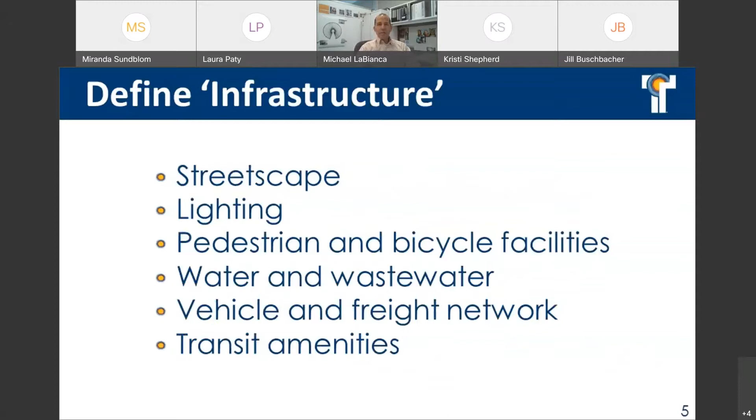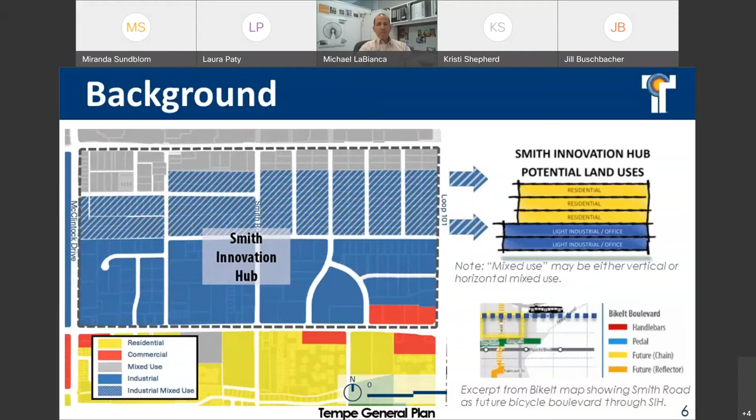An example of the mixed-use land use is Tempe Station, a multifamily and retail development with hotel planned for the vacant parcel along Rio Salado between Perry Lane and Smith Road. In addition to the general plan amendment, the city approved the Smith Innovation Hub Development Guidelines. There are also a number of existing City of Tempe policy documents that provide guidance for the proposed improvements.

Tempe recognizes the operation of many businesses in the Smith, both new and those that have been here for decades. Approximately 250 unique employers reside in the Smith, employing over 5,000 people. The majority of buildings in the Smith were originally built for industrial and manufacturing uses.

The design features of these buildings are more consistent today with newer uses such as mixed-use commercial, office, and retail, as modern industrial manufacturing businesses typically require higher ceilings, wider and taller shipping bays, wider turning radii on site, and larger lots. As a result, the Smith is experiencing changes in the use of buildings, resulting in greater occupancy and changing uses.

In addition, the Smith's location is also very important in determining the infrastructure needs for the greater area. This graphic highlights some of the surrounding land uses, such as Tempe Marketplace, the Rio 21 development, and the proposed Novus development, north of Rio Salado Parkway, west of McClintock Drive.

Physical barriers that exist east and west of Smith include the APS substation to the west and State Route 101 loop to the east.

The area immediately south of the Smith includes the Escalante and Alegre Parks communities. These neighborhoods are home to nearly 9,000 people. This population, largely multifamily residents, have higher shares of demographic groups that contribute to transit dependency when compared to the overall city. Zero-car households are nearly 1.5 times the rate of the city, and these factors contribute to a population that uses transit and bikes for commuting at 1.5 times the city's rate.

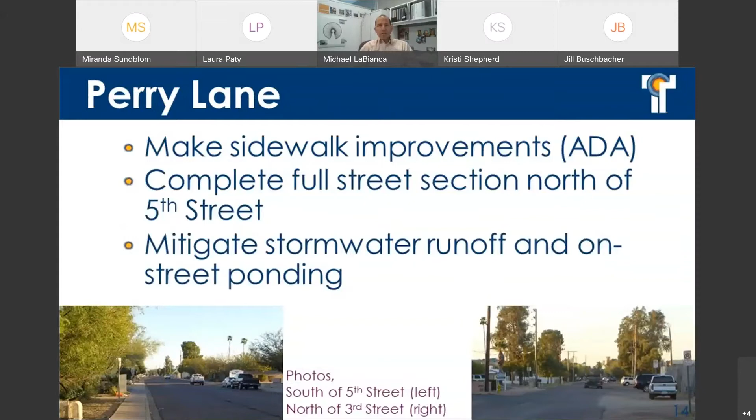All of the improvements on Perry Lane would address sidewalk gaps and improve sidewalks and intersections for ADA compliance. North of 5th Street, improvements would address the lack of curb and gutter and drainage.

Alternative A on Perry Lane, north of 5th Street, includes parking on both sides of the street, curb and gutter, and sidewalk at the back of curb. Note that lighting is shown on all alternatives, as lighting is proposed in the short term on these routes, addressed in a later slide.

Alternative B introduces sidewalks detached from the curb to accommodate a landscape strip with street trees and the ability to incorporate low-impact development.

Low-impact development is a sustainable approach to stormwater management that utilizes the landscape to absorb stormwater runoff, reducing off-site flows that can contribute to stormwater ponding and increased infrastructure costs. On Perry Lane, north of 5th Street, low-impact development would introduce curb cuts and curb extensions that would replace some on-street parking with landscape areas that would use low-impact development techniques to manage some of the stormwater.

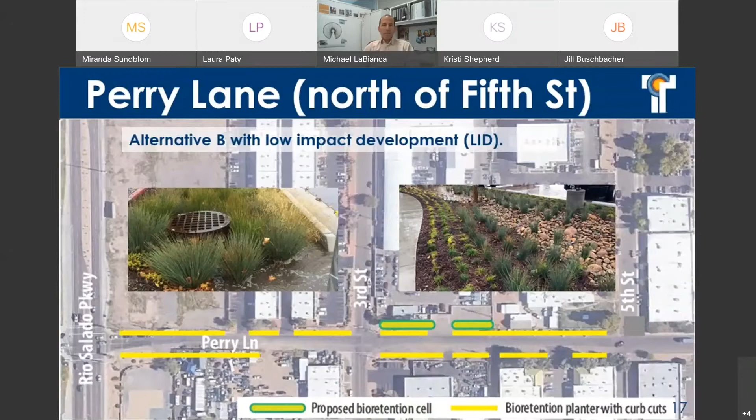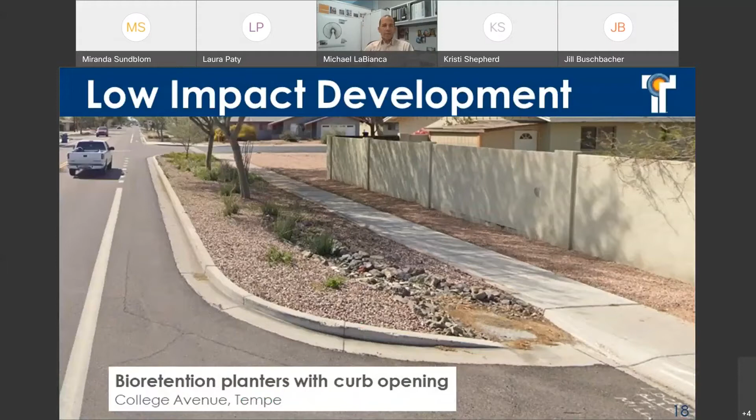For Perry Lane south of 5th Street, proposed improvements include the addition of on-street parking, street striping and lighting, and improvements to sidewalks at intersections with 5th Street for ADA compliance.

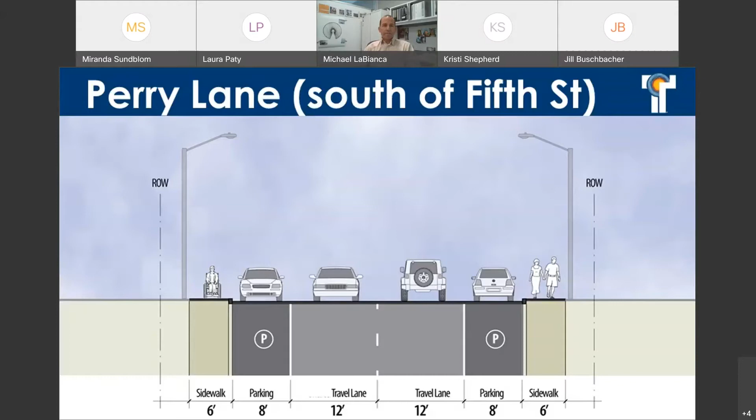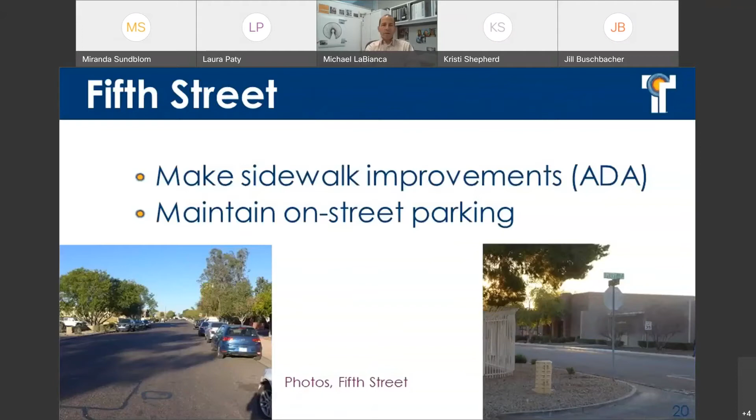Improvements proposed for 5th Street between Perry Lane and Smith Road would address sidewalk gaps to accommodate on-street parking to varying degrees, as shown on the alternatives.

Alternative A would replace the existing sections of back-of-curb sidewalk with a detached sidewalk, allowing occasional curb bulb-outs to incorporate street trees and additional LID, or low impact development.

LID techniques here would improve the streetscape appearance and help offset the stormwater ponding on Perry Lane, as some of the rainwater runoff in Smith is originating from areas to the east and south. LID on 5th Street would help mitigate the flow and flood and stormwater ponding that occurs on Perry Lane.

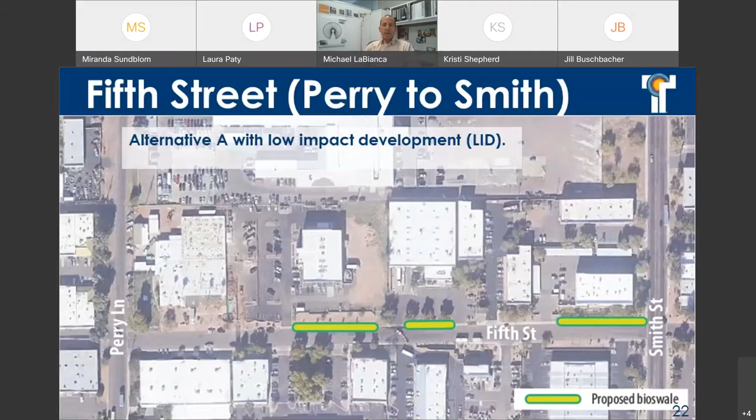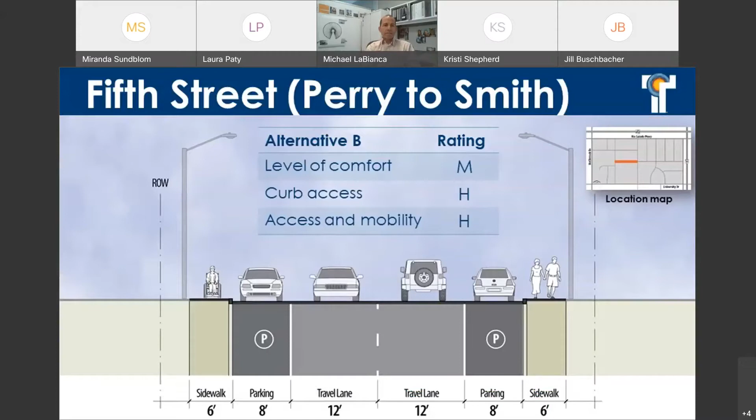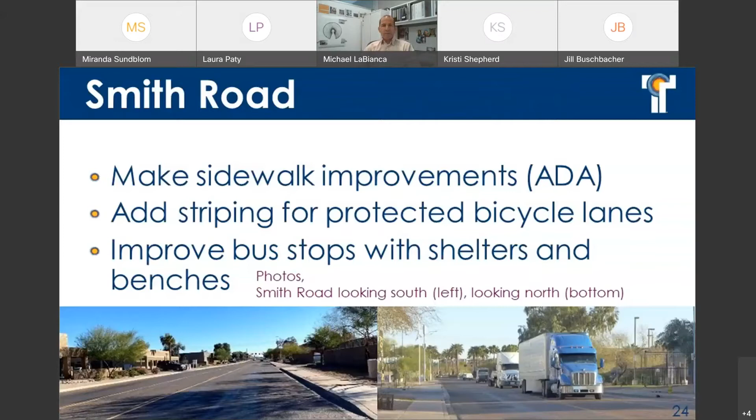Alternative A maintains a two-way left turn lane and replaces the area of parking with marked bike lanes. The bike lanes would consist of a standard 6-foot bike lane separated from traffic by a 2-foot buffer.

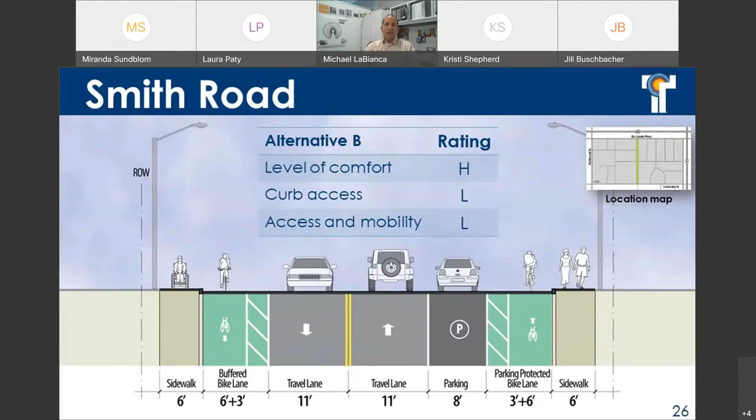Alternative B eliminates the two-way left turn lane and preserves parking on the east side of Smith Road. Elimination of the two-way left turn lane would impact traffic flow, as cars making lefts off of Smith Road would have to wait for breaks in traffic to access driveways along the road. It is anticipated that traffic volume on Smith Road would accommodate this without resulting in significant congestion.

This slide presents a summary of the proposed improvements in the short term. I'll take this moment to remind you that all of the alternatives are presented in the alternative survey, which will allow you to review the alternatives at your own pace and provide comments.

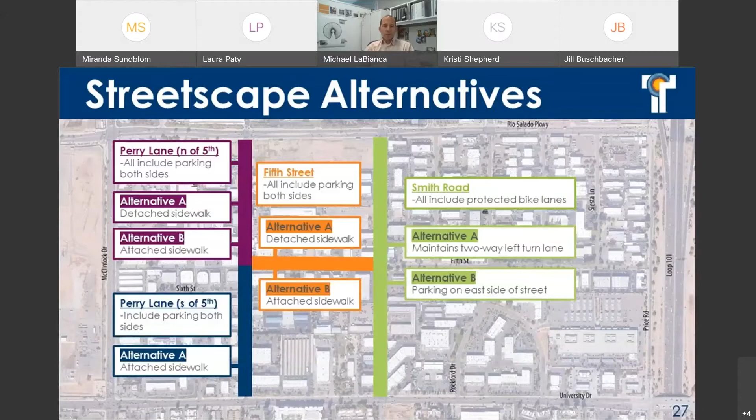Improved lighting in the Smith has been requested by business and property owners. A lighting assessment was performed applying Tempe lighting standards to come up with a lighting plan for the short term.

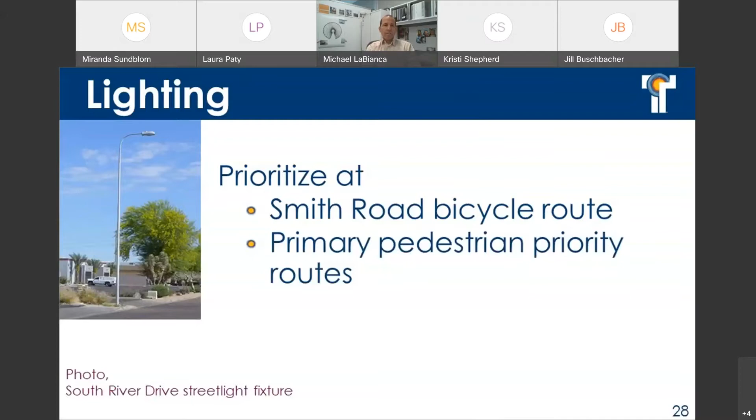This slide identifies new lights, shown as yellow symbols, which would bring the network of Smith Road, 5th Street, and Perry Lane up to city standards. Proposed long-term improvements for the Smith would bring lighting on all of the Smith streets up to city standards.

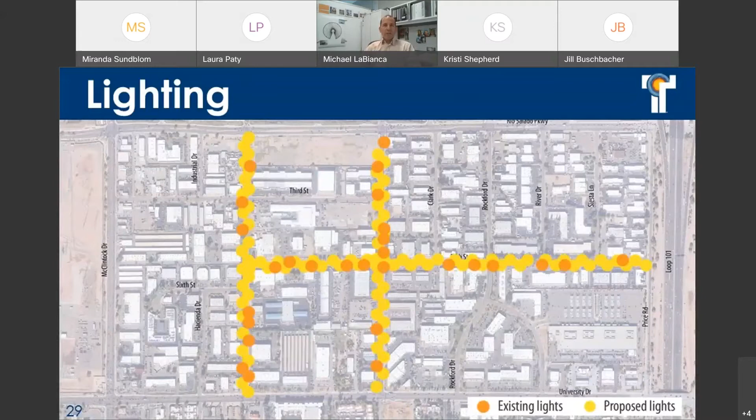The Tempe Water and Wastewater Master Plan identified overall system needs through the 2040 planning horizon based on Tempe's general plan.

The general plan amendment passed in October changed the land uses to allow greater density in the Smith, which could result in increased water and wastewater demand beyond what was projected at the time of the Water and Wastewater Master Plan. The infrastructure plan is evaluating the difference and the resulting impacts to the system to make recommendations.

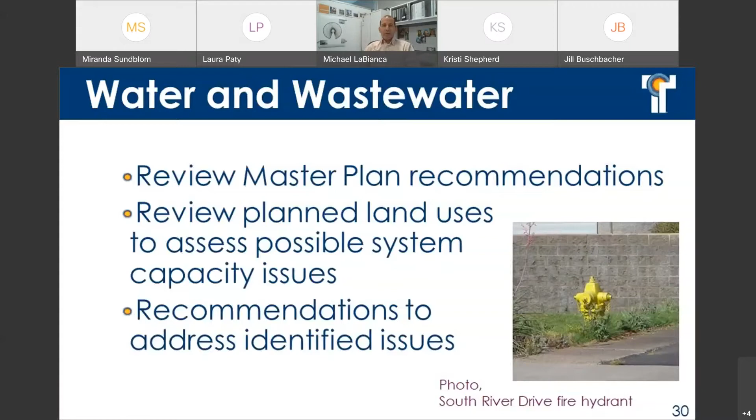We have to work with this as a necessary and vital element of the Smith. One approach to managing the truck traffic in the Smith is to work with the businesses to direct truck traffic to identified routes. This doesn't limit truck circulation in the Smith, but the guidance would be to ask that businesses direct deliveries and shipments to the nearest available route to access and exit the Smith.

Through voluntary participation, the city can work with businesses to mitigate the impact of truck traffic on the Smith as the activity in the Smith and surrounding area increases.

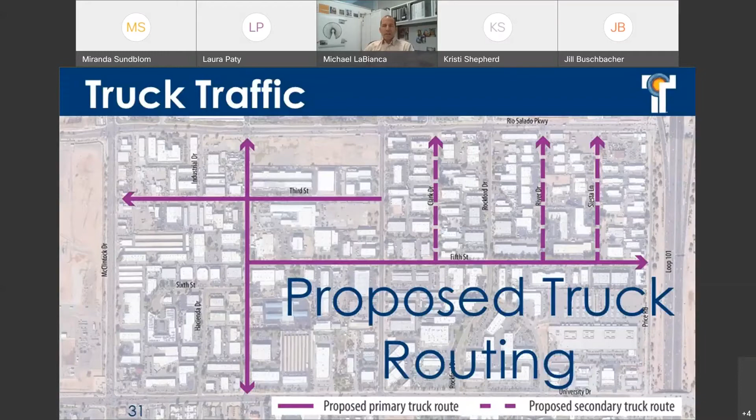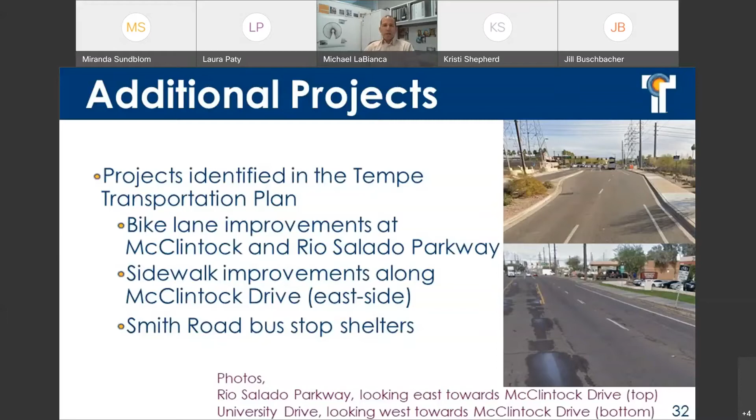Additional short-term projects identified include projects previously noted in the transportation plan. These include bicycle lane improvements at McClintock and Rio Salado Parkway and McClintock and University Drive, sidewalk improvements on the east side of McClintock Drive, and Smith Road transit shelters.

Change is already happening in the Smith with adaptive reuse of buildings and more intense development. Proposals such as Tempe Station, a large mixed-use development plan for the Rio Salado Parkway between Smith and Perry, will introduce residents, visitors, and more retail development to the Smith.

Long-term improvements in the Smith will be implemented through the City of Tempe Capital Investment Plan projects as opportunities arise and as part of the redevelopment and zoning.

In the long term, Perry Lane south of 5th could have sidewalks detached from the curb and incorporate additional street landscaping to match the segment proposed north of 5th Street.

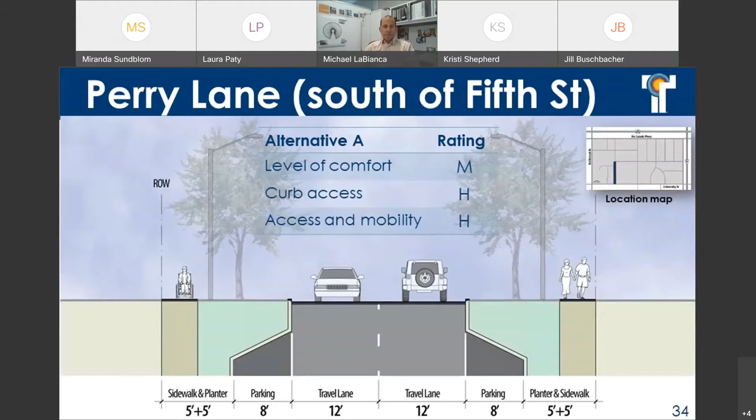3rd Street would be improved to accommodate pedestrian sidewalks and landscaping. In addition, some parking could be replaced with these future improvements to accommodate curb bulb-outs for increased landscaping and street trees for shade.

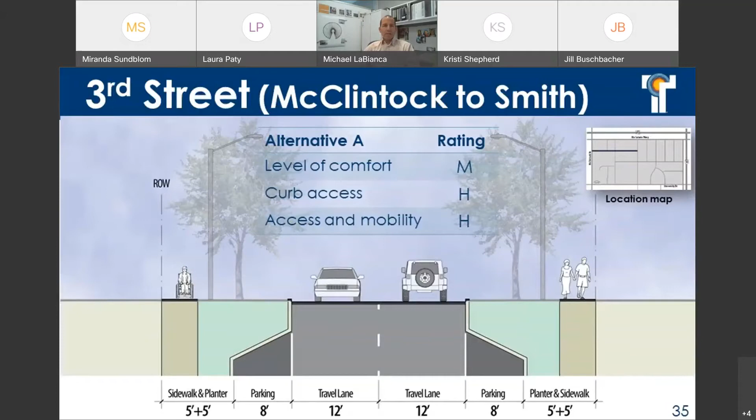Over time, as the Smith develops and new uses introduce more commercial and retail uses, 5th Street will become increasingly important as an east-west connection through the Smith. 5th Street from Smith Road to Price Road could be improved with sidewalks and landscape areas.

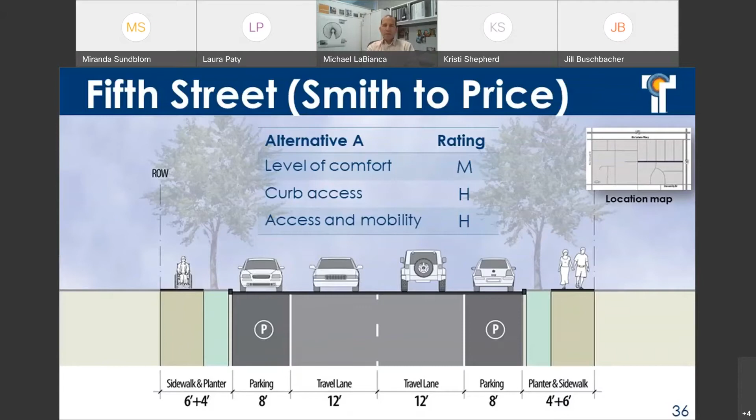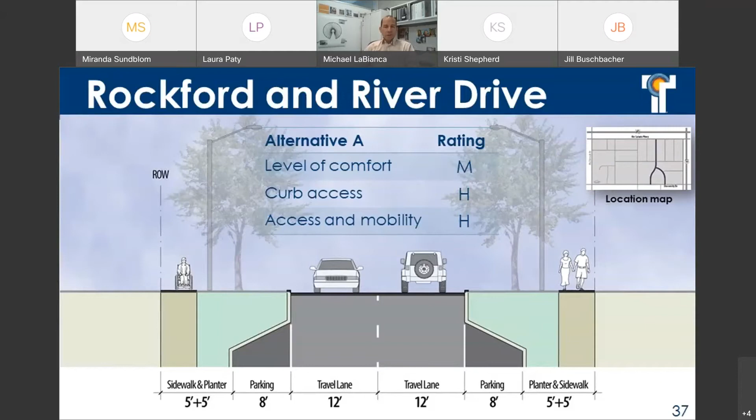In the future, Rockford and River Drives can provide another north-south route with detached sidewalks and shade trees, with areas of curb bulb-outs to control speeding and allow for increased landscape trees. North of Rockford Drive, Rio 2100 provides a connection to the multi-use path along the Rio Salado.

Over time, it is imagined that Smith would take on a more urban composition as development intensifies in the northern half as a result of the adopted general plan amendment land uses. When development occurs in this area, consideration could be made for providing improved bicycle and pedestrian connections through what are today quarter-mile long blocks. Such long blocks discourage more urban mixed-use developments envisioned for the Smith.

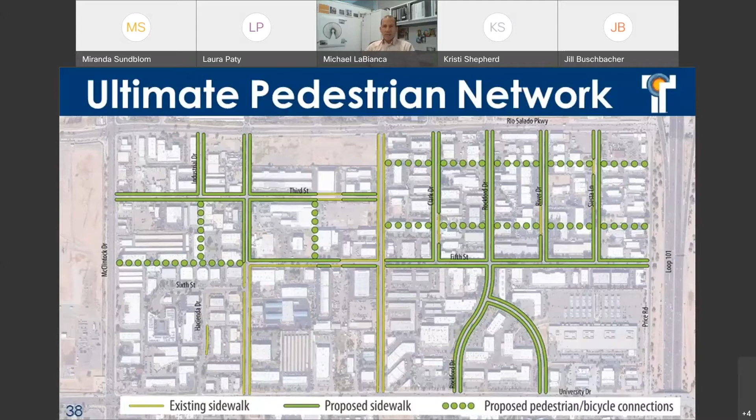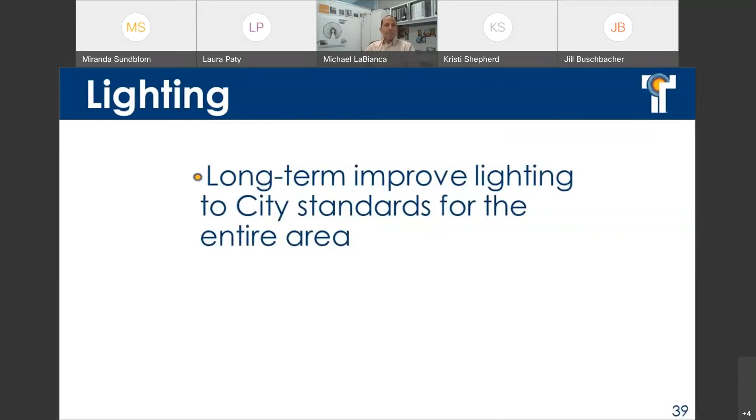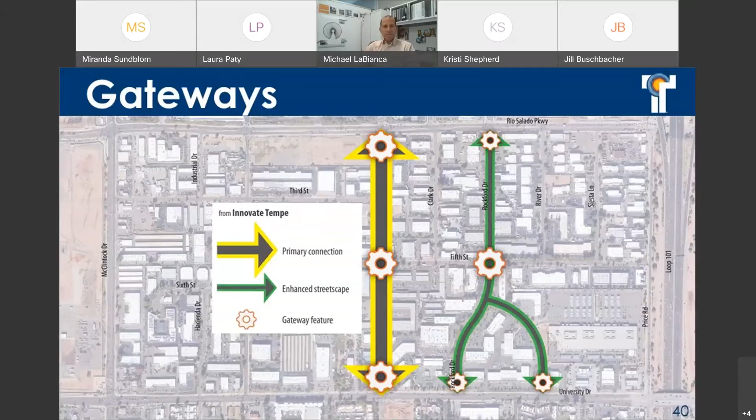Next steps for the project will be to consider the alternatives with the feedback we received through today's meeting and the alternative survey. The team will develop preliminary cost estimates for the recommended projects. This information would be presented at a follow-up public meeting tentatively planned for July 16th.